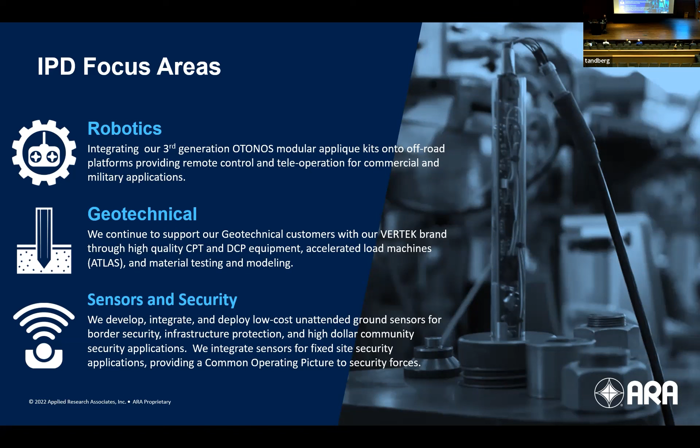So we do a lot of cool stuff here. I enjoy working here. This is everyone else here. So a lot of neat stuff.

So today we'll talk about robotics, and then we'll jump into some of our ADAS features.

We've also worked on drones over the years, such as the Nighthawk and the K-Hawk. We've integrated these robotic systems into skid steer-like devices, and also forestry equipment and things like that. More recently, we've started equipping these devices to things like the Polaris MRZR, the MRZR Alpha, minefield robots, and of course Humvees that are being upgraded retroactively.

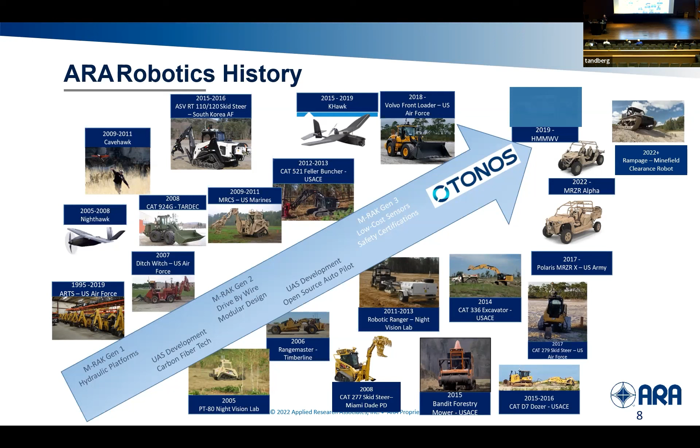So this is kind of an example of the architecture that we use. This is an integrated platform with our OTONOS system. Probably the brains behind everything is this little VIC controller, the Vehicle Interface Controller. This provides all of the robotic controls, plugged into all of the actuators on the system, like steering actuator, throttle actuator, and it monitors everything going on inside the vehicle. We use an IOP and ROS-based front end with a redundant CAN back end. We also use a safety processor to make sure we don't accidentally kill anybody, and we also talk directly to MRZR systems.

The second thing on here is the teleop kit. This teleop kit performs a lot of machine learning and also connects to our radio interfaces, camera interfaces, and IOP interfaces. So if this vehicle, let's say an MRZR, is far off in the distance, we can connect to it using a mesh network of radios, and then using those radios we can use operation control units, like a handheld USB remote to control driving direction, acceleration, etc., or a tablet in conjunction with it to see where the vehicle's going. I believe these radios go out to about 2 kilometers with line of sight, maybe a little bit more.

I'm going to let NEYA talk about their autonomy kit and all the cool stuff they do, but basically they can do waypoint navigation, object detection and avoidance, GPS navigation, GPS denied navigation, and follow me, where the vehicle basically just tracks you as you walk along.

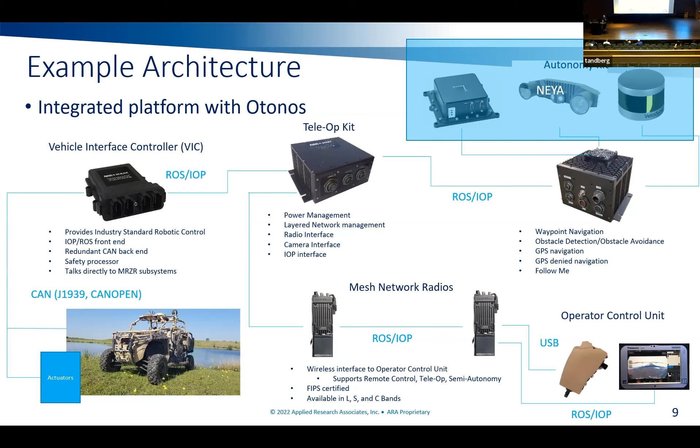So this is where the meat of the talk is, and this is probably where more of the technical data comes from. This is our advanced driver assist systems, also known as ADAS. These can be integrated into vehicles that have the OTONOS system, or standalone.

We've actually integrated this system into a vehicle recently that was tested at AM General Proving Grounds out in South Bend, Indiana. So this is just a brief overview of the system that we have here. A lot of this is the vehicle interface and throttle, shifting actuators, brake, etc. But we also have a lot more sensors on this now to integrate into all of these ADAS features.

So we have a stereo camera at the front of the vehicle, a long-range radar at the front of the vehicle, an IR camera, and an EO camera. On the sides of the vehicle, we have two short-range radars, and at the back of the vehicle, we have a backup EO camera and a short-range radar.

There's a bunch of other goodies on here that's not particularly mentioned, mostly side cameras, but we're not going to really see a demonstration of that today.

So this little interface right here is actually what would be mounted inside of a vehicle, just arbitrarily. So we have all of the different ADAS features at top that can be toggled on inside the vehicle. These can also be toggled on if you're inside that little tablet interface that I showed before.

So all of the current ADAS features, and a lot of these we're going to show today, include blind spot monitoring, forward collision, adaptive cruise, and lane departure. The two I'm not going to show are park assist and rain sensor.

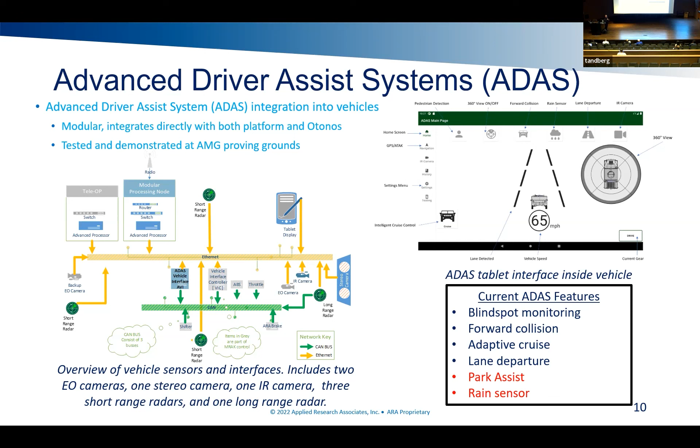So I just want to provide a quick overview of blind spot monitoring and kind of what it looks like when we look through a tablet and things like that. So this is that Panasonic tablet that I showed before. So right now we have a

vehicle that's equipped with this whole autonomous system, and I'm basically just changing different views. So I looked at forward camera, rear camera, infrared camera. I forgot to mention that there is an IR camera on here.

And I believe this last video is the lane detector. So we actually developed an interface where you could actually see lanes moving around. So these cyan lines represent actual road lanes. This is getting some fake detections there, but this magenta line also represents a complex lane detector, and I'll talk more about that. And it's more for like Jeep trails and things like that.

So just to quickly demonstrate blind spot monitoring, I had a colleague of mine, Jeremy Kolb, walk around the vehicle while I was recording this video. So you'll notice right away - let's see if I can get my mouse over there.

So their right is flashing already. That's just because there happened to be a vehicle parked too close by, so it was just triggering in this particular instance. But you'll see that the left will trigger and then the rear will trigger as he walks around. So he started on the left and then he goes to the bottom.

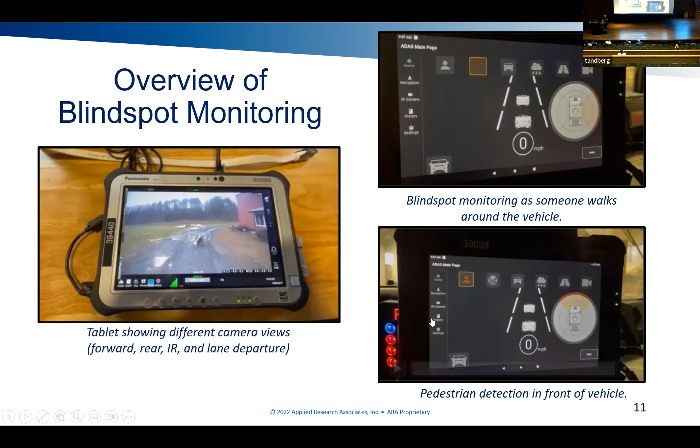So I'll play this video. Sorry about that. Yeah, so you can see it was going off with him walking around. Play that one more time. Yeah, so it's going off, and then he's just walking around and says hello.

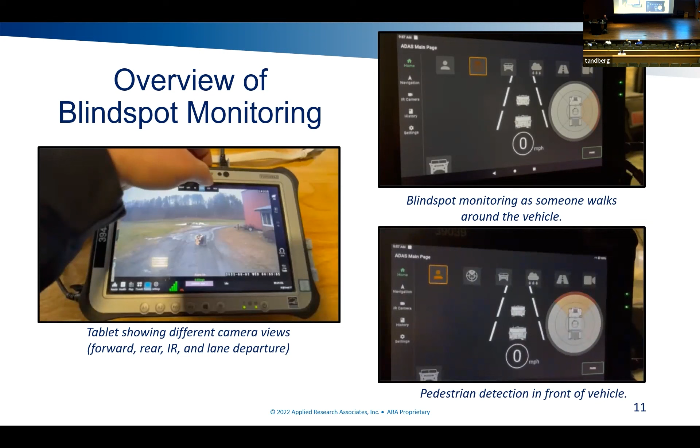Okay, probably a less complicated ADAS feature that we'll start with, and then we'll get into more complicated stuff, is forward collision detection. This is actually a fusion of different sensor data being input. We're still doing that machine learning process looking for people or vehicles in front, but now we're also combining that with forward long-range radar data and stereo point cloud data.

Essentially how this works is that if a person is detected anywhere in this field of view, the closest radar point detected to the vehicle is going to be assumed to be that person or vehicle. Now, you can make this more precise and say, hey, why don't we just pick a radar point that matches where the location of that person is? And that's fine, we're going to do that.

It's just when you deal with point clouds, there's a lot of computational processing going on, and we found it was hard to get that to a point where it was actually safe to operate. So basically, we just pick a radar point closest to the vehicle and start tracking it using a basic Kalman filter. That data is fed to a different control system, which applies brakes proportional to the distance of that person or vehicle away from the front of our vehicle. I'll talk a little more about the PID on the next slide.

This video is a quick demonstration of a pedestrian being tracked by a collision detector, with position and distance estimates represented on the top left. These are simulated road lanes arbitrarily placed in front of the vehicle, so only radar tracks inside of this are actually considered valid targets. Again, these little purple dots are radar detections.

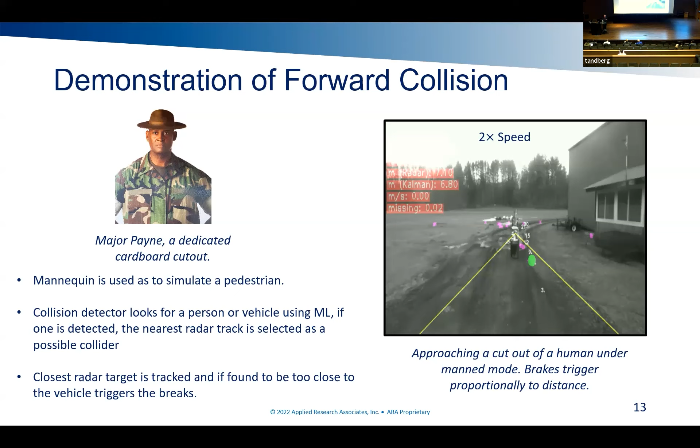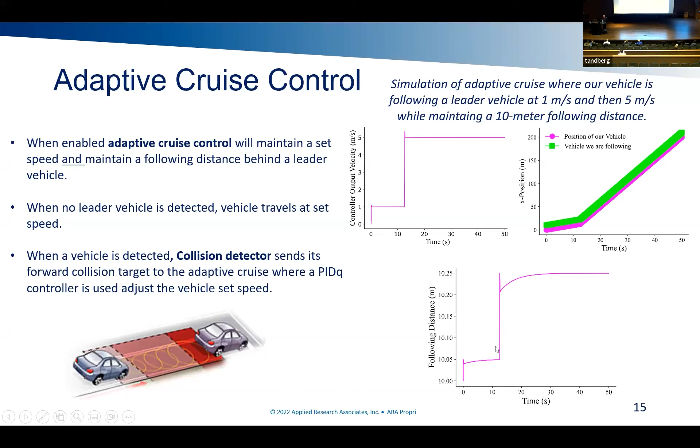So in this little simulation graph over here, what we're doing is having a leader vehicle move at 1 meter per second, and then it accelerates to 5 meters per second. So looking at this controller output velocity. In the second graph, we're trying to estimate the position of our vehicle versus the vehicle we're following. So apologies, there's some lag on the mouse. If our vehicle is trying to follow this vehicle, this axis is the x-axis. We can see that, given the positions of the two, we're tracking it quite nicely. And when we actually measure the following distance with time, if we're trying to maintain a 10-meter following distance, we're about 1% error. So actually pretty good.

So when we actually do a demo of this via adaptive cruise, where we're actually trying to follow a leader vehicle, I'll walk through this as much as I can. I also have two graphs on the side that basically show how brake and throttle efforts and distance measurement change with time. I think at first we were trying to just a 10-meter set point, and then we changed that to a 15-meter set point.

So we'll see. He backs up at first, and my foot's still on the brake. So probably right about here on this graph is where we start moving. As we start moving, my vehicle's moving at a crawl, basically. And then when he gets far enough away, my vehicle will start to accelerate again to about whatever the set speed was. I think it was like 4 miles per hour.

So you can see we're moving along, and then he actually brakes his vehicle. And then as I get closer, we start tracking the vehicle, and eventually the brakes get applied and our set speed changes. You can actually see it here. We accelerated and then we slowed down, and now we're accelerating again, trying to catch up to him.

And I think as soon as I come around this curve, we are actually just going to stop, if I remember right. Yeah.

So I'm very sorry I can't actually show you my vehicle in these videos. There were some restrictions we had to deal with from the government. But basically in the secondary graph, you can see all the distance with time and how sometimes we lose tracking, and that's fine as long as we pick it up again within a reasonable time and don't collide. It's more than fine.

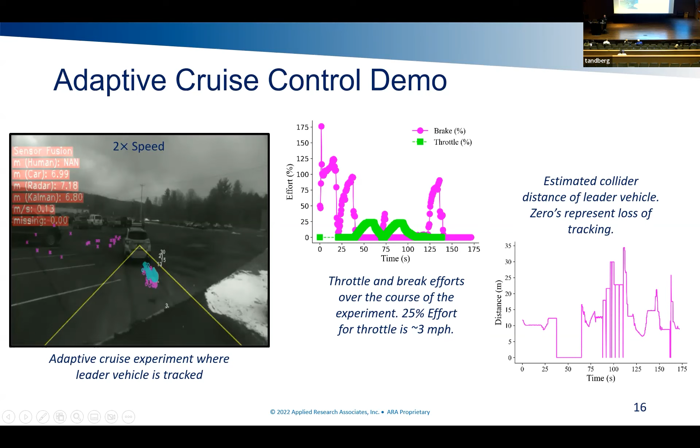All right, so the last part of the ADAS features that I'll talk about today is lane departure systems. In our vehicle, we actually have two lane departure systems working in parallel with each other. The first one is road lane departure, and the second one is complex lane departure. Road lane departure is exactly what it sounds like. We're looking for pristine road lanes, and we have a machine learning algorithm that can actually extract these road lanes from whatever the forward EO camera is doing.

Using a combination of image processing, linear regressions, and other logic in the background, we can estimate when this lane is departing versus when we're safely inside the lane. An idea was posed to do complex lane departure, achieved using a separate neural network. The idea is if we're having vehicles move around in complex environments like Jeep trails, we need a way to develop a lane from that.

We had a lot of footage collected by ARA staff, but we also developed simulated data sets where we used Unreal Engine to produce fake dusty environments. So this is just a trail, and then there's dust clouds coming over.

We also did this for sun glare. In the annotated environment, you can see we identify what the smooth trail looks like, what rough trail is, foliage, etc. So when we apply this to a simulated model, we can see that this real live Jeep trail is actually classifying pretty nicely.

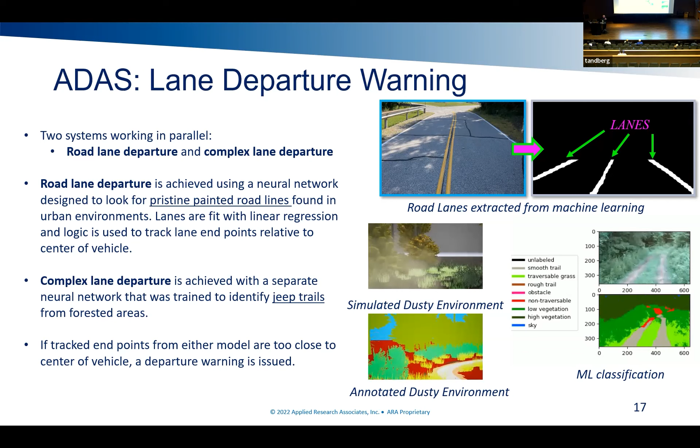So how about we see some demos of this actually working? The left will show complex lane detection, where the magenta line represents an estimated complex lane, while the white lines represent estimated intersections of where it thinks it is. You can see the algorithm actually works pretty nicely. It's detecting the Jeep trail.

I apologize if this is all pixelated, but it seems to be a common effect with Zoom. You can see when we hit the intersection, it's trying to give the driver a prediction of which way it could potentially go.

Unfortunately, I don't have a video showing both of them working together. This video shows it on the right, but this is more showing road lane departure. As we start departing the right lane, when this turns yellow, it'll send an alert to that ADAS tablet I showed you before, alerting the driver that we're going out of lane and should probably adjust. You can see the complex lane detector trying to do stuff.

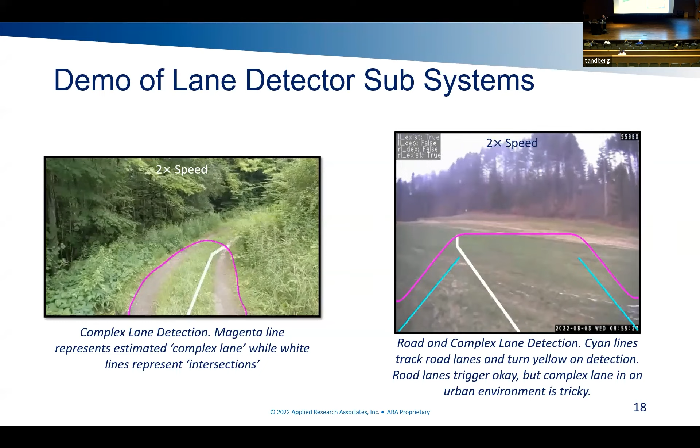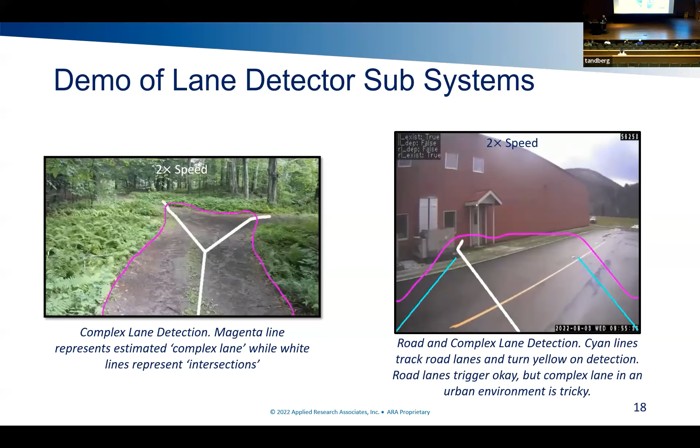It does work in certain urban environments, but because it's wintertime and there's not really a defined trail in front of us, it's just seeing everything around it. So this will turn around and eventually do another departure. I think it'll do the right lane again. Yep, let's see it go.

I'll let this play to the end because I think it does try to map out this little trail at the end here. Yeah, it does a little bit. You can see we get a false detection there, but it actually does outline this trail fairly nicely. Again, snow and stuff wasn't designed for it, so odd things happen.

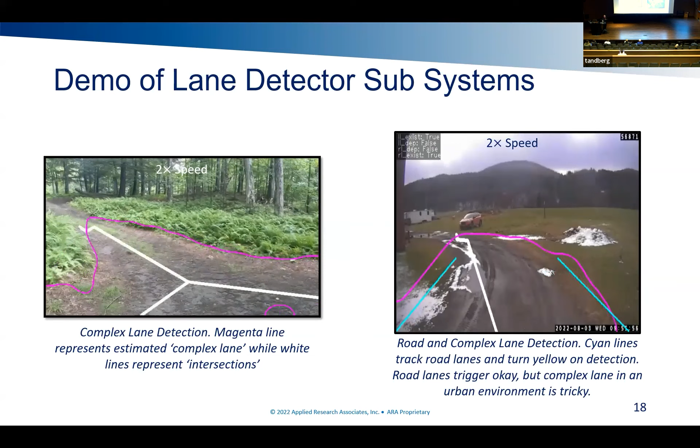So just some closing thoughts on ADAS and all of our systems. I wish I could have shown more videos, but you saw the important ones. ADAS can greatly improve the ability of drivers and prepare them for diverse situations. We saw collision detector work fine, up to about 10 to 20 miles an hour. We also saw adaptive cruise control, lane departure, and blind spot detection. We can integrate these features into autonomy and potentially remote operation in the future.

We're already doing it with drive-by-wire, where we have the tablet and can see a lot of this stuff trigger and happen, but we can make this way more complicated. As we saw, integrating these ADAS features requires multiple subcomponents and a great deal of time and testing. So that wraps it up from my end. I'll pass it over to Andrew, who will do the Neya Systems overview.

Thank you. Sir? Does this work?

All right, good afternoon, everyone. My name is Andrew Capodieci. I am the Director of Robotics at Neya Systems, and as was mentioned earlier, Neya is the Advanced Autonomy Division of ARA. I'm going to talk you through some of the work we do in off-road autonomy, which is our focus. Neya really focuses on the hardest challenges in off-road autonomy.

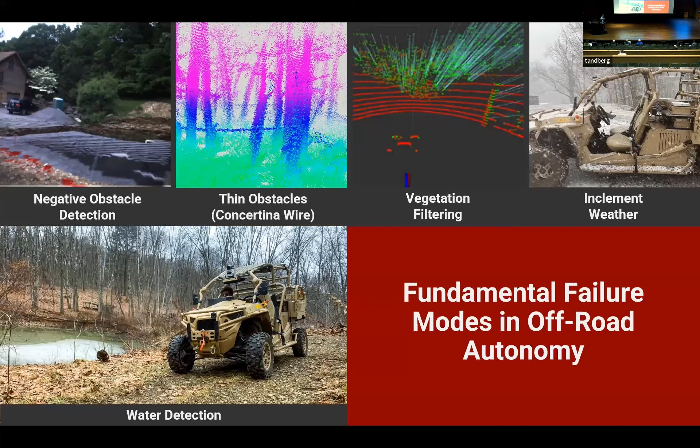So a lot of these things — I would say the first 4, negatives, thins, vegetation, and water — are things that on-road does not have to deal with as frequently. Inclement weather, I think, is shared. And these are the types of problems that we try to tackle in these rugged off-road environments.

I've got a video here showing our stack, so let's see if I can get this to play.

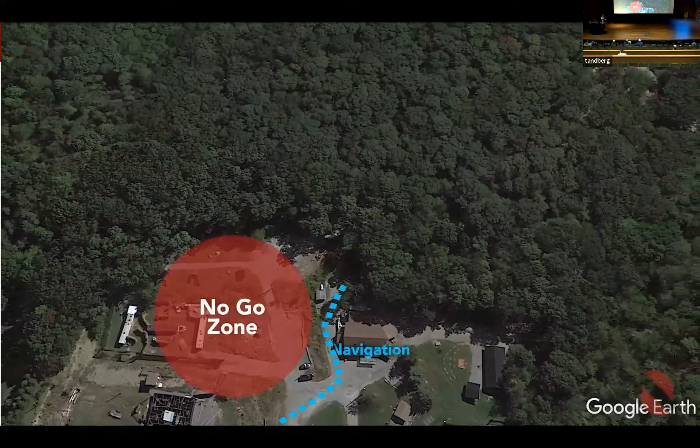What you'll see here is our main IRAD test platform. It is based on an MRZR X diesel electric hybrid. You're going to see 2 behaviors here running on our 80-acre off-road test site. The first behavior here is waypoint follow, so we've got relatively coarse breadcrumbs that are defining a path up to the forest. Using our mission planning layers right at the forest, we've drawn a phase line, and the vehicle will automatically transition from the waypoint follow in the open area where you've got GPS accessibility to a go-to-point behavior. And it has no a priori data.

When it enters the forest, it is seeing this environment for the first time, and using a combination of LiDAR and camera, it is building up a map of the environment. It's localizing in a GPS intermittent scenario, so there will be stretches inside the forest where it's completely GPS denied. It is localizing where it is, aggregating the perception data to build a model, and given a single point that it is trying to achieve at this point in the video, it's somewhere over to the right. It is trying to figure out what path it can take through this environment to achieve that goal point.

So right here, we've passed that phase line. The video is coming through a little choppy, but this vehicle is fully autonomous. We've got a safety driver in the passenger seat, again, just for safety purposes. And as I mentioned earlier, there is a point off to the right. So the vehicle right now is seeing this environment for the first time and trying to figure out how it can exit and start to enter into the congested area of the forest to achieve this goal.

You'll see that it is following the trail right now, not because it has a model of the trail or because it's detecting the trail, but purely because that's the open region of space in this environment. Ultimately, it will find a path over to the right in a second here, where it can fit through, and we'll start to navigate towards that single point that it's been requested to achieve within the trees.

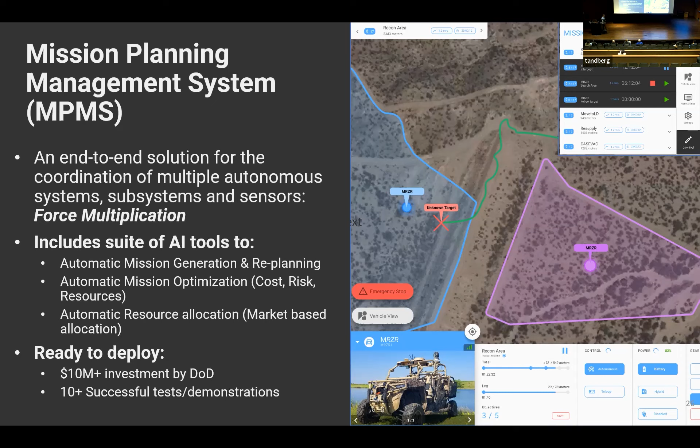There are a suite of AI tools that automate the generation of the mission, the allocation of assets in an optimal way with respect to things like time to completion or resource consumption. And then there are also pieces that will automatically schedule different parts of the tasks based on dependencies that may be shared between them. This has actually been the first program that Neya ever worked, back in 2009, a SBIR program in mission planning. And this work has continued to this day.

Simulation is another one of our capability vectors, which we stood up for the off-road case. There's a lot of work on-road, but as I've mentioned, the requirements for perception and planning off-road have a lot of differences. So we've taken open source tools like the Unreal Engine and Carla and built on top of those the off-road pieces that we're missing.

This originally was stood up out of our own necessity, since autonomy development requires simulation. It's extremely useful so you can significantly reduce the use of on-vehicle testing, which is costly with respect to human resources and vehicle resources. After the ANVEL simulation piece, which was primarily used off-road, got bought out by the on-road industry and disappeared for those of us in the off-road space, we generated this ourselves with some sister divisions in ARA, specifically the Virtual Heroes Division, which specializes in simulation.

We built this out with things like vegetation-aware LiDAR, which enable the off-road simulation pieces that we really need. It turned out that just like we need it, there are other developers in the off-road space, and this has actually turned into a funding stream for us as well. So it's something that's being actively developed and has been useful to other parties.

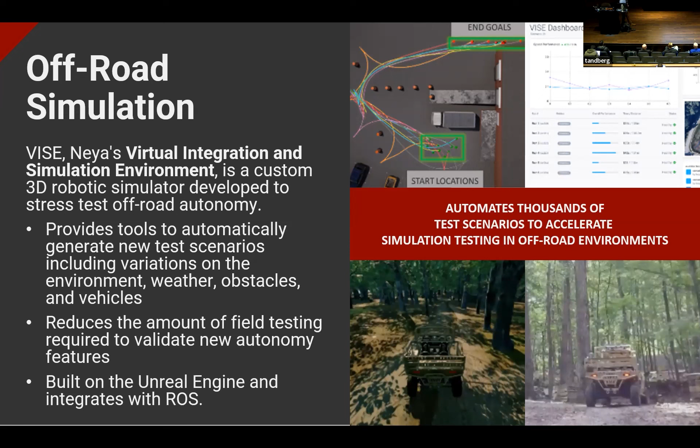The way we use this is ultimately generating thousands and thousands of test scenarios to accelerate our testing. You're able to drive perturbations of the scenario, evaluate metrics, and really hammer on capability with that off-road focus, adding to the perception's fidelity in these off-road environments.

Here I've got a couple of other programs I want to speak to in terms of the type of off-road autonomy we work on. I mentioned negative obstacles earlier — in the top left, this is a program we're working on now where we're pushing the state of the art in terms of what an off-road vehicle can do to detect things like cliffs, ravines, potholes, etc.

About two months ago, we ran our first demonstration on vehicle where we had that same MRZR X platform I showed driving in a field, on one side of a ravine about three meters deep. We clicked a point on the other side of the ravine and ran the system just to make sure the vehicle correctly detected that negative and did not try to drive through.

This was through a fusion of both LiDAR and monocular imagery. As we're driving through, we're processing that LiDAR data, analyzing things like the sensor field of view, the noise variance within the cost map, as well as range shadows, and looking at ray tracing to see if voids in the terrain are caused by obstruction from positive obstacles or could in fact be a negative obstacle.

We've also got image-based detectors that look at intensity gradients in sort of a sandwich form — think of the meat of the sandwich versus the bread — looking at intensity gradients through those three areas and cross-correlating that with voids in the LiDAR data to ultimately detect these negatives. We showed we were able to do so up to a range of about 40 meters. That vehicle would drive around left and right trying to find a way past this long ravine, and ultimately decided there was no path across.

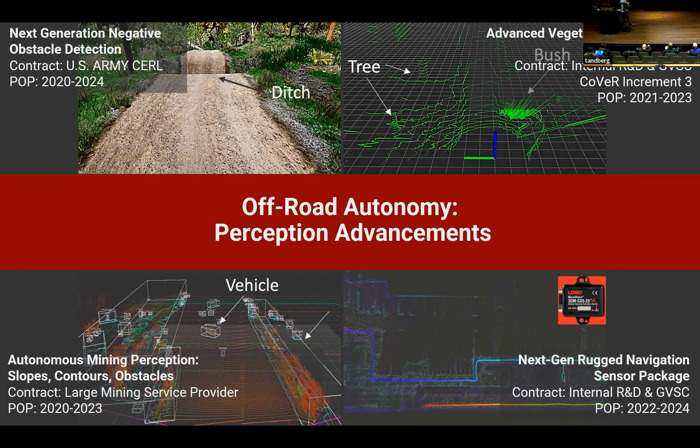So I think we can open it up to questions if anyone has some. Yes, sir.

Yeah, it is proprietary. I mentioned we did build it on top of some open source tools, but then added proprietary layers for the off-road specific pieces like the vegetation aware LiDAR. That is something that we have developed contracts for, or essentially been awarded contracts to work with third parties. So that is an avenue, but it's not something that's open source.

Yes, sir. You're looking at fusing a number of these algorithms. You presented like a pedestrian detector. How much of this is developed in-house? How much of it is taking best in class? And if so, how much tuning is required? And finally, I think there's an opportunity for metrics, quantitative, that go beyond just it looks good. If you could speak to that, that'd be good.